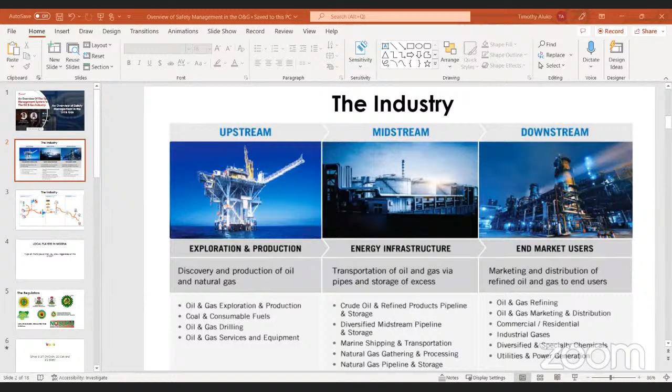This midstream process takes the raw oil, which is a mixture of oil, natural gas, and natural gas liquids, and separates these components, a process which also results in water being produced. The water is either recycled or disposed of, that's a lot of stories, just for us to have an understanding of how it works. Now this is a further breakdown of the upstream.

You can see your drilling wells, drilling and completion, well completion, gathering of pipes, that's to build the networks upon which the midstream will ride, the production wells, the oil refineries, that's taking what happens there initially as compared to what now happens on the downstream, the natural gas separation and the processing plants.

Then you now look at the midstream, where you have the transportation, maybe via sea, road, or rail, maybe some level of underground networks, some level of storage, where you have FPSO, the S there is for storage. Then you now have the pipes.

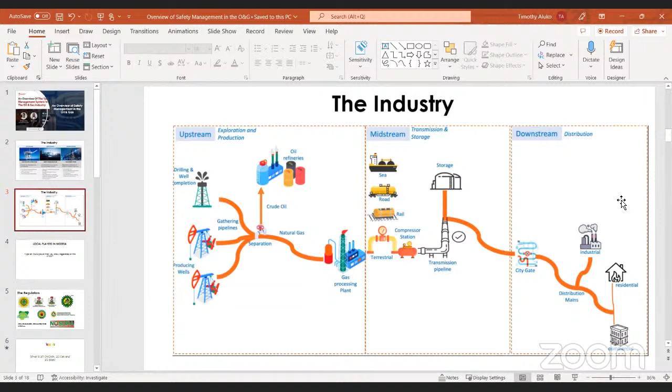Then when it now gets to downstream, that's like getting to where they want to refine and then subsequently use the product in terms of DPK, PMS, AGO, butane, cooking gas, aviation fuel, and the rest. This is just to help those of us that are not in the oil and gas industry open our minds to a better understanding of how the industry works.

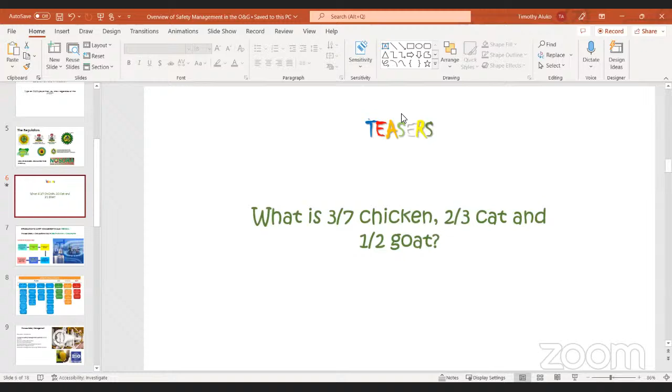No. Sometimes the solution lies in your regulatory handout. It lies in your factory act. It lies in all your standard operating procedures. It is not as hard as you think, because the oil and gas industry is a well-regulated industry. Everything you want to do, everything you hope to achieve, is in the procedure. Just read and look at it well.

So like I said in my introductory speech, of course we want to look at the ideal. However, we know that for us to have safe production and consumption, walking from the upstream to the downstream, it tells a lot on process safety and occupational health and safety. But again, we'll touch occupational health and safety lightly. We'll touch on process safety a little and talk about some process failures that happen in the industry that led to accidents, and how those should be addressed going forward in our different levels of work.

I don't know if you work upstream, downstream, midstream, or somewhere around the marginal field, or somewhere around servicing, which applies to all the streams - you will be able to agree with me after this class. Now, I'll briefly talk about how 18001 was first released.

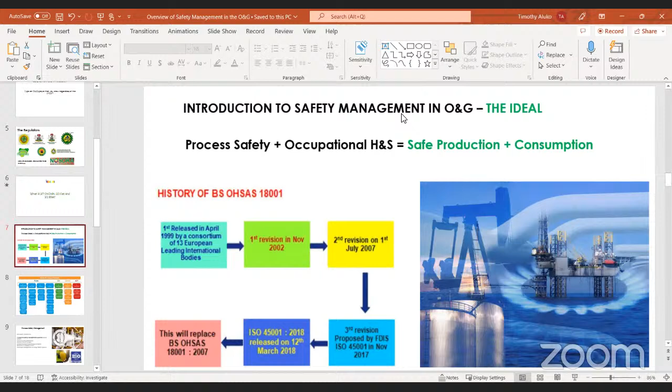That's the Occupational Health and Safety Management System, 18001:1999, which then advanced to 2007, before it now gets to where we are now, which is 45001, released on the 12th of March, 2018. Third revision proposed by FDIS - these are just things for us to know.

Now this applies be it in construction, be it in aviation, be it anywhere - the 45001, which is the occupational standard. Like I said, there is the process, which is the very technical one, and there is the occupational. All of these speak the same language in the industry, except for some criticality and some application differences. That's for the occupational health and safety.

The requirements are clear from clause 1 to clause 10. Clause 3 covers terms and definitions. You have normative references - all those preludes before you get to the critical management system requirements, which run from clause 4 to clause 10.

Now, what do we understand about the application of this in all industries? Good news is that even if you're not yet in the oil and gas industry, or you're looking forward to being there, this applies wherever you are, and you take it along with you when you have the opportunity in the oil and gas industry. If you look at food and beverage, they have a lot of processing equipment, a lot of plants transferring through conveyor belts and the rest. So the machineries are somehow related, and you might bring a lot of knowledge from this section.

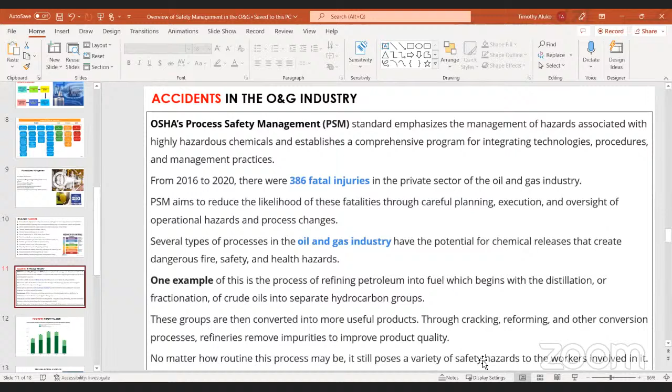From 2016 to 2020, there were 386 fatal injuries in the private sector of the oil and gas industry. PSM aims to reduce the likelihood of these fatalities through careful planning, executing, and oversight of operational hazards and process changes. Several types of processes in the oil and gas industry have the potential for chemical release that creates dangerous fire, safety, and health hazards.

One example of this is the process of refining petroleum into fuel, which begins with distillation or fractionation. That's the fractional distillation I spoke about, of crude into separate hydrocarbon groups. These groups are then converted into more useful products through cracking, reforming, and other conversion processes. Refineries remove impurities to improve product quality.

No matter how routine these activities may be, it still poses a variety of safety hazards to the workers involved in it. There are a lot of areas we should touch on.

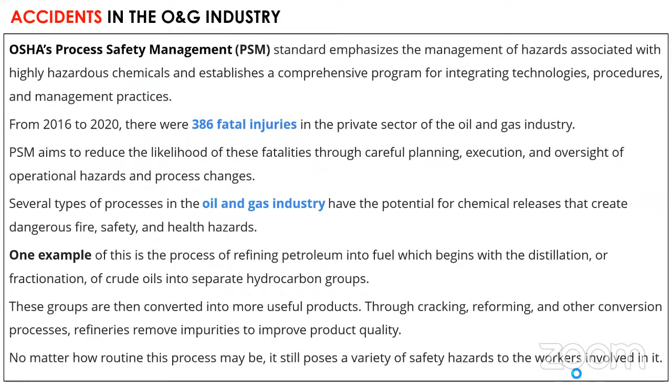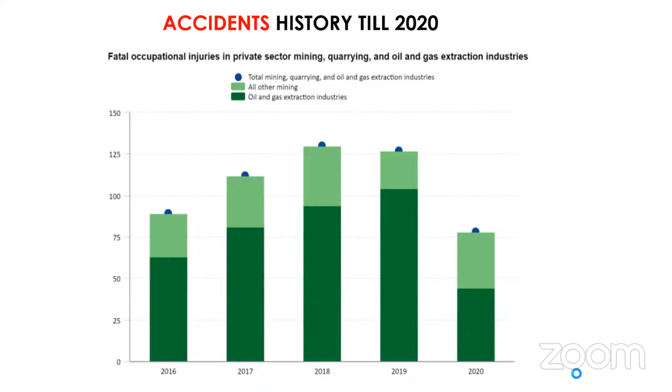Now let's just take two failures, two critical issues that have happened in the industry. Of course, I'm sure we all know about the almighty Piper Alpha platform in the North Sea of United Kingdom, operated by Occidental Petroleum Caledonia Limited. It produced 10% of North Sea oil. Explosion on 6th July 1988, killing, remember, mark this, it killed 167 men. Who knows, maybe there are more. Only 61 people survived out of a lot of people that were on that platform that year. Total insured loss was about $3.4 billion.

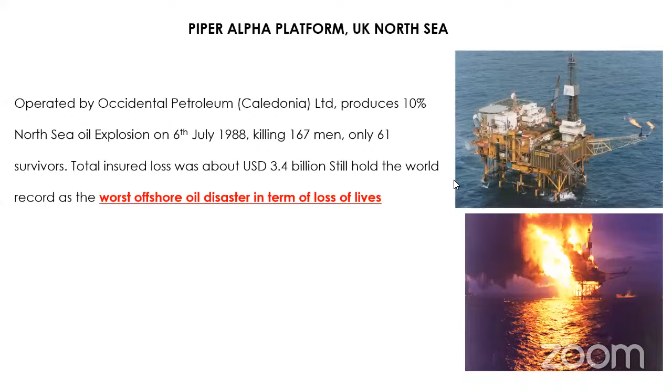This singular event still holds the world record as the worst offshore oil disaster in terms of loss of lives. I'm sure if I ask a lot of us some questions about, okay, what is it that failed, people would have a lot of answers. Oh, this should have been done. Oh, this wasn't done. Oh, why didn't they do this? These are medicine after death.

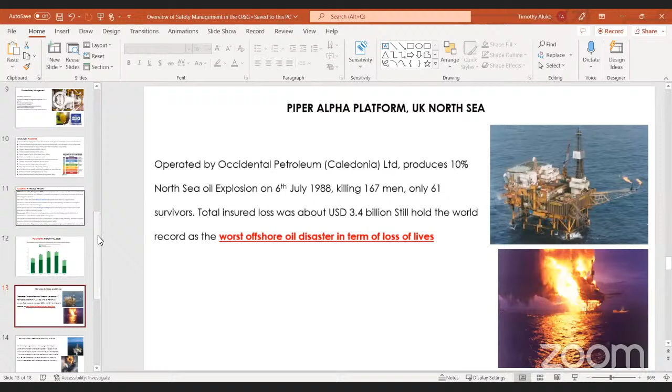Some persons will say the firewalls on Piper Alpha could have stopped the spread of the fire. They were, however, not built to withstand an explosion. The initial blast blew the firewalls down. Proper location and fireproofing of emergency shutdown valves are essential in order to cut off fuel supply. You will begin to hear a lot of things, a lot of reactive things. Then why are we waiting till then? And I'm sure they did a lot of work, but unfortunately some things failed and led to that. We don't have time to discuss much on that.

Another one is the BP Macondo, Deepwater Horizon, US Gulf. Macondo prospect operated by BP. Of course, I'm sure those in oil and gas have heard a lot about this. Piper Alpha, Macondo operated by BP resulted in explosion in the Deepwater Horizon semi-submersible rig, that's Transocean operated. 11 people were lost and never found. Oil kept flowing from the subsea well for 87 days until capped on 15th July 2010. You know what would have happened to the lives in the sea, what would have happened to the underwater creatures when there is a consistent flow of oil for 87 days uncapped.

Estimated 4.9 million barrels total discharge to Gulf of Mexico. In July 2015, BP agreed to pay 18.7 billion in penalties, the largest in US history, and it still holds the world record as the largest accidental marine oil spill.

Now this that I said, should I say the direct cost? You might not know that there are two costs to an accident: direct and indirect. You might not be able to estimate the level of indirect cost of this accident. Then why do we wait for them to happen? Of course there are failures, but if you put all the measures in place and timely evaluate, monitor, and measure the performance of your equipment and processes, you might be able to beat this down.

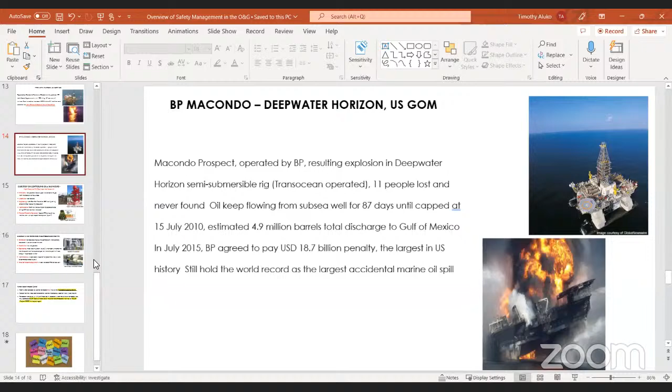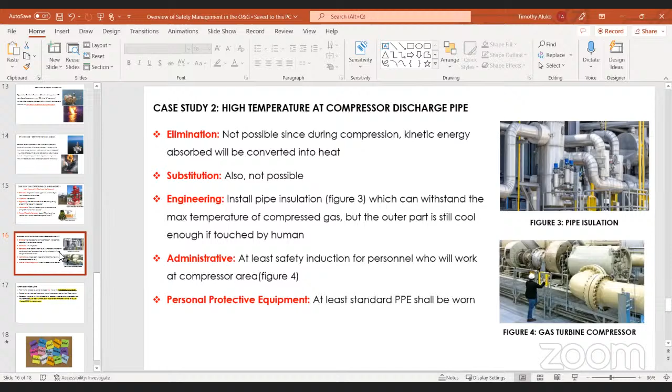Then how do you now control the human factor? From a human perspective, controlling hazard must involve knowledge and health, where people are subjected to health measurement and health checks, and special training is required for personnel working in dangerous locations like the oil and gas industry. You know it's a very high risk industry, and also a very highly regulated one. For people just visiting offshore facilities, especially when traveling by helicopter, they must do the BOSIET and the rest of them.

The industry is very vast, and the lecture would have been more comprehensive than this, but because this is just an overview, maybe some other avenues would avail us the opportunity to go deep into some areas where we can speak what the engineering people will be speaking, and how we can do a lot of process safety management, from our compressors to all the equipment. We can also look at the spacing arrangement, the minimum spacing arrangement, the level of valve protection, our temperature relays, temperature meters, and temperature gauges. You are dealing with temperature, pressure, volume, and a lot of other exposures.

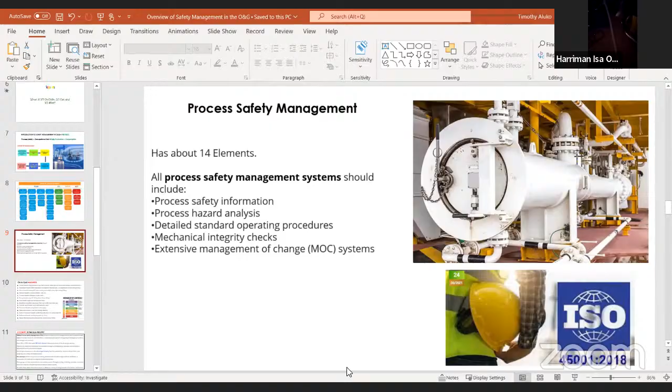Okay, Timothy, thanks a lot for your presentation, I enjoyed it. Thank you very much. You certainly had a lot packaged in there, and like you said, you will need a lot of time, if not days, to go through every bit very well. But I think it's all captured.

But I think I was a bit curious. When you listed the hazards, you put mechanical handling, there will be manual handling. You didn't — maybe it escaped you, or you reserved it for next time — there was nothing about manual handling, and I think people will want to know about that.

And when you were discussing, you just touched on Piper Alpha. Well, of course, we know the causes of Piper Alpha. There was a transfer pump that was malfunctioning, that was removed, but nobody marked it as removed.

And because I came to the North Sea shortly after Piper Alpha, I'm quite aware of it. And the Macondo one, I was involved as an investigator, so I'm actually an investigator and technical auditor. So great to have you, sir. I know a bit about all this.

What I thought you would emphasize next time: whatever barriers you have, once you put a human being in front of a machine or a process, you can rate yourself as 50% close to mistakes. Because unless a part fails, which is also a remote failure of a human being - the man who put it there, maybe a substandard part or anything like that - you'll find that whatever we do, when we say people, procedures, and equipment, it's always the human being who is the problem.

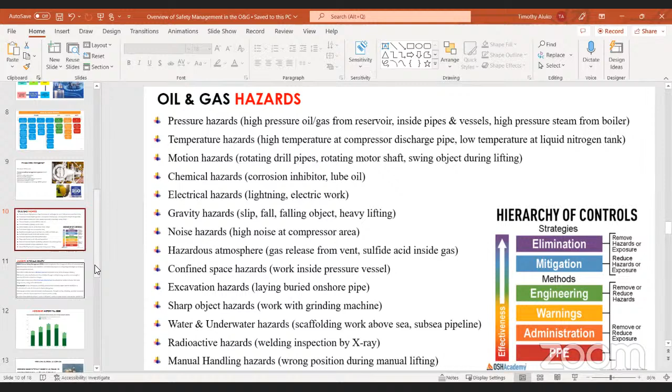Not that it is not effective. Of course, by your hierarchy of control, you know that the most effective is elimination, then engineering or whatever. I just tried to change this - the substitution, the engineering, the administrative, and the rest of them. So based on this example, based on the case study here, you know you apply hierarchy of control to all problems.

Based on this problem, it is not possible to eliminate pressure because you need it to get what you want. If you eliminate it, that means you won't extract more from the reservoir.

Now, how do you substitute it? You can't substitute it. This is based on this example, not that this is not practicable. Of course, in a lot of processes you use elimination, you just eliminate it or substitute with whatever, using some level of engineering. But based on this case study, maybe I should have removed something on this heading so that it is well understood.

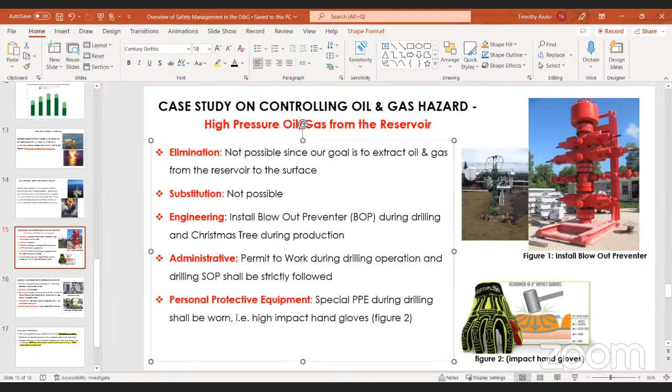So you need it. You can't eliminate it from this process, this example that I gave. But it remains very effective. Other problems, yes, but okay, I get you now. Thank you, I get it.